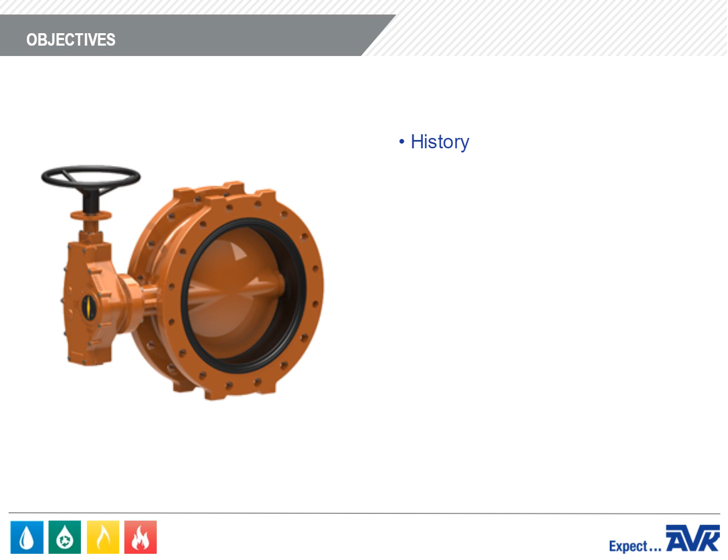Welcome to the American AVK Series 816 Butterfly Valve Overview Module. In this module, you'll learn all about the AVK Series 816 Butterfly Valve, including history, function, standards compliance and testing, butterfly valve construction features, product range, and technical information.

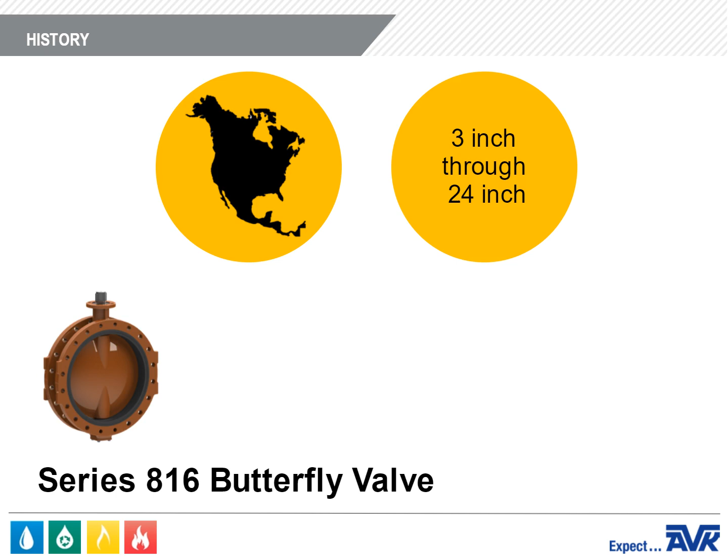The Series 816 Butterfly Valve was developed specifically for the North American market. These are butterfly valves that range from 3-inch through 24-inch, with flanged, MJ, MJ biflange, and wafer end connections. The main function of a butterfly valve is to regulate water flow by turning it on or off.

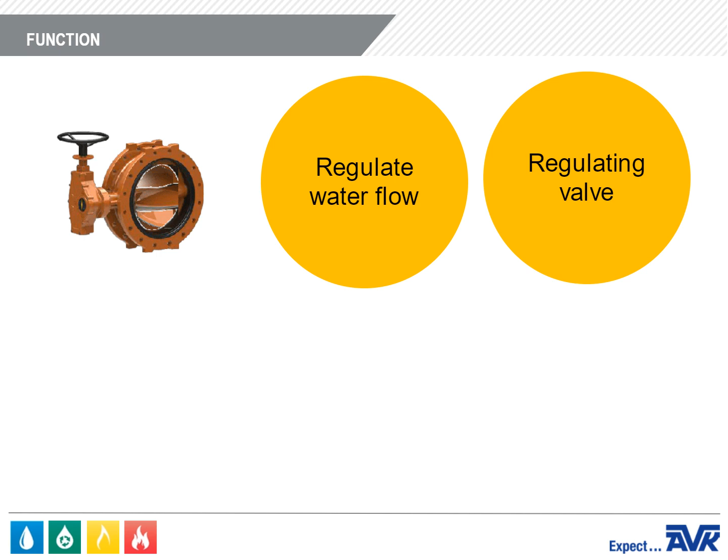It can also be used as a regulating valve, but using this butterfly valve as a regulating valve may create cavitation due to the difference in upstream and downstream pressures, and that can cause damage to the valve, so this should be discussed with AVK before use.

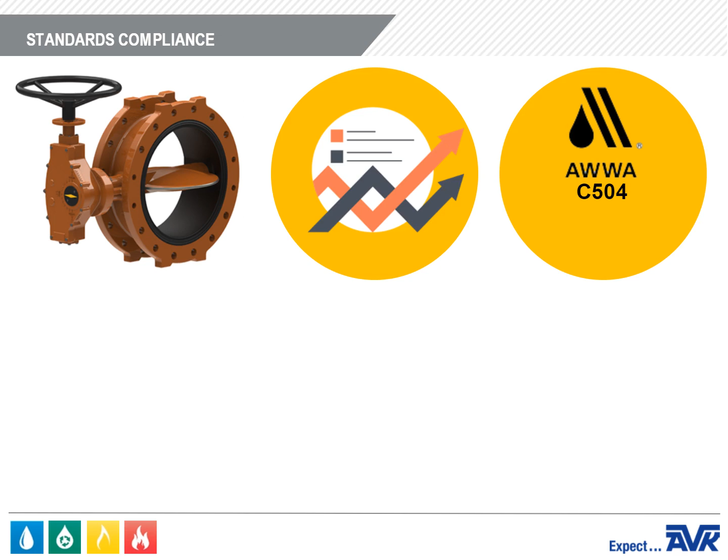The AVK Series 816 meets or exceeds the requirements of AWWA C504, which is the AWWA standard for butterfly valves. The coatings meet or exceed AWWA C550, but keep in mind that the exterior of the above-ground valves can be coated with standard paints.

These butterfly valves are certified to NSF 61 for the health effects of drinking water and NSF 372 for lead. And, as with all AVK products, they are manufactured in an ISO 9001, ISO 14001 certified facility. The AWWA proof testing has been completed as required by C504.

A 12-inch valve was cycled for 10,000 cycles, and a 24-inch valve was cycled for 5,000 cycles, all at 250 psi unbalanced pressure. The nickel-copper welded seat was cycled 100,000 times on a 4-inch valve, and then cycled for an additional 100,000 cycles on a 12-inch valve.

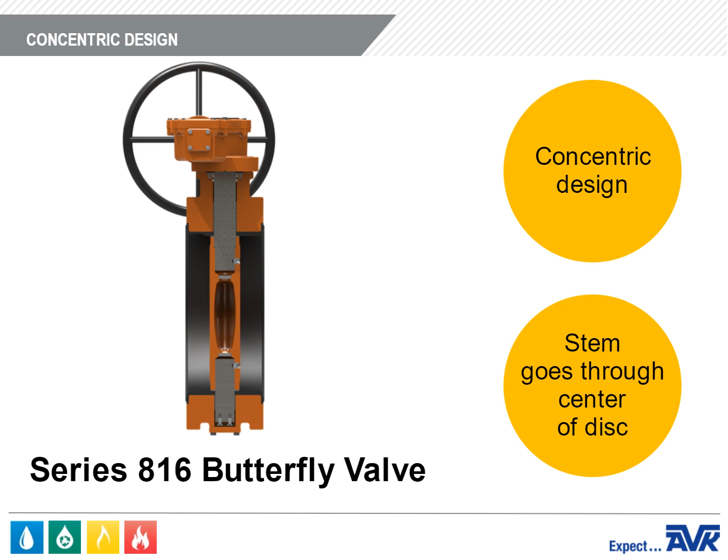Now let's discuss the design and construction of the AVK Series 816 butterfly valve. The Series 816 butterfly valve is a concentric design, which means the stem goes through the center of the disc as opposed to an eccentric design where the valve disc would be to one side of the stem. The advantages to the concentric design are that it is a low head loss design and the valve is bidirectional, which means it seals equally in both directions.

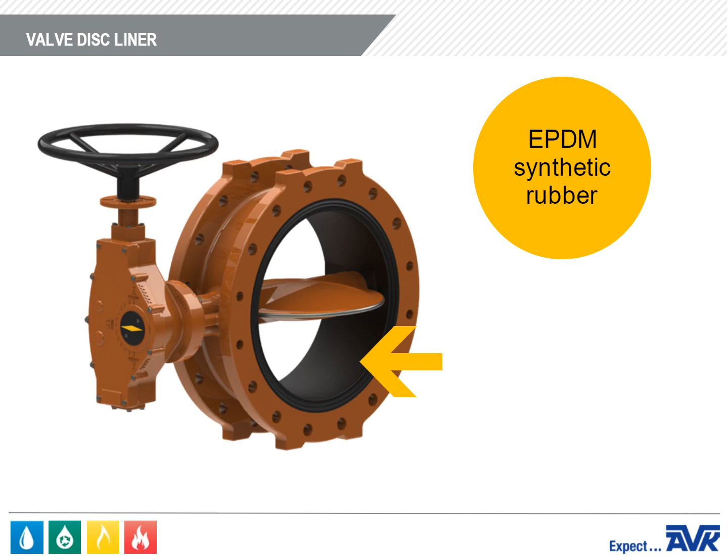The valve liner is EPDM synthetic rubber. The EPDM is a proprietary formulation by AVK Gummi. It's called EDJ70. This formulation is required for Series 816 due to its low swelling and compression set properties. The valve seat does not require seat adjustment.

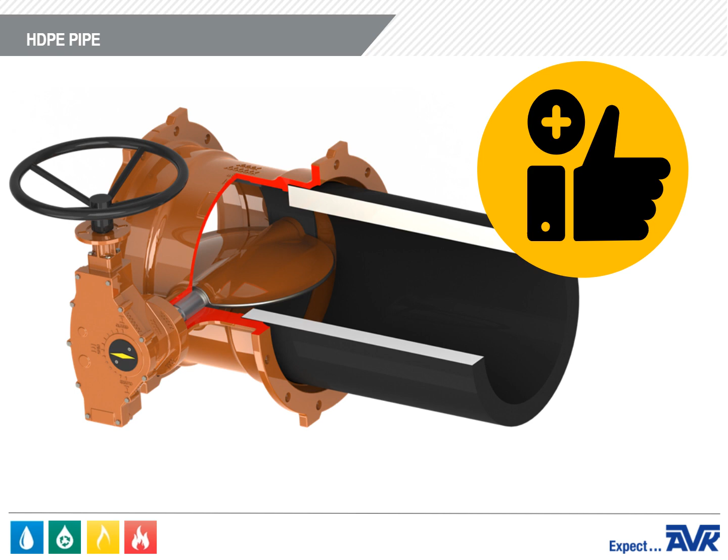The rubber seat also forms a flange gasket on the flange and wafer butterfly valves. With this design, contractors save on gasket expense. Wouter Witzel, an AVK sister company and butterfly valve manufacturer, has used this design for many years and has not experienced any problems.

A big advantage of the Series 816 butterfly valve comes when it's used with HDPE pipe on MJ valves. The MJ and MJ flange versions have been designed to accommodate PE pipe without requiring beveling the pipe for disc clearance. This is up to and including DR9 pipe. No other manufacturer that we know of can do this.

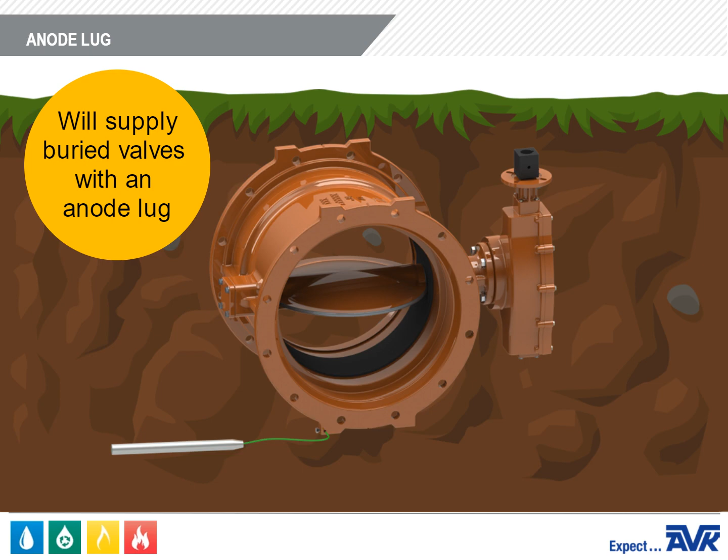AVK will also be able to supply buried valves with an anode lug. As you can see, this valve has feet. The feet on the valve body can be drilled and tapped for anode lugs.

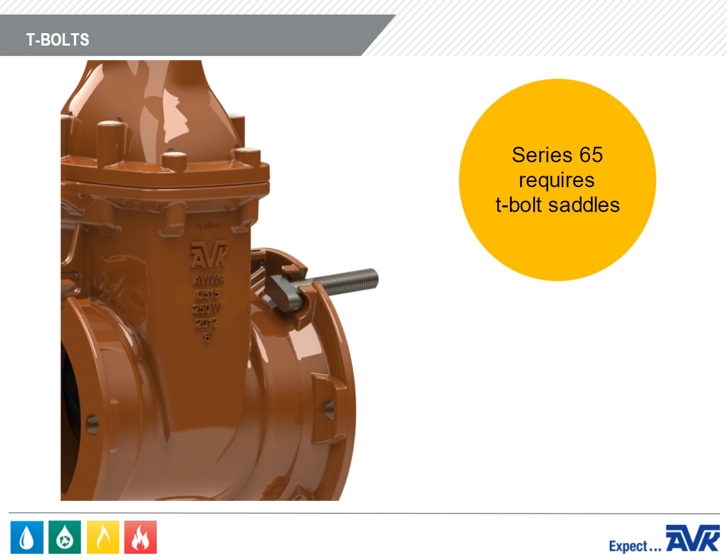The AVK Series 65 has T-bolt saddles to stop the T-bolts from rotating out when the valves are installed. Since this valve is so long to accommodate the HDPE pipe, all of the holes of the MJ bolts are circular, so you don't need the T-bolt saddles and the T-bolts will not rotate out of the U-slots.

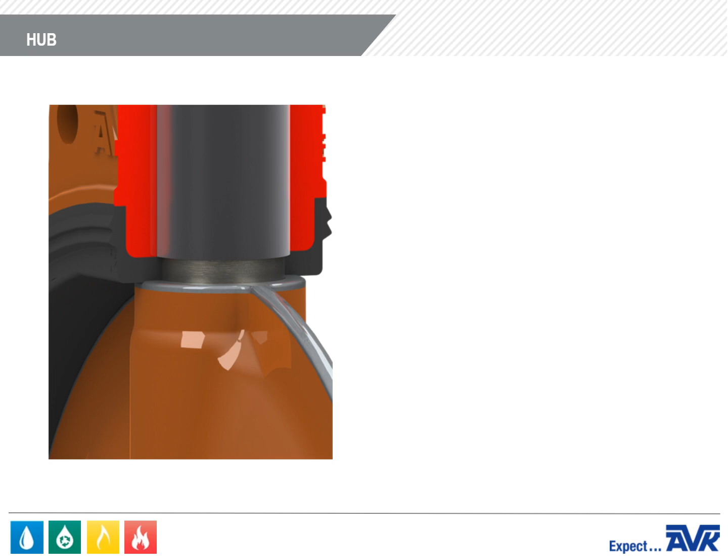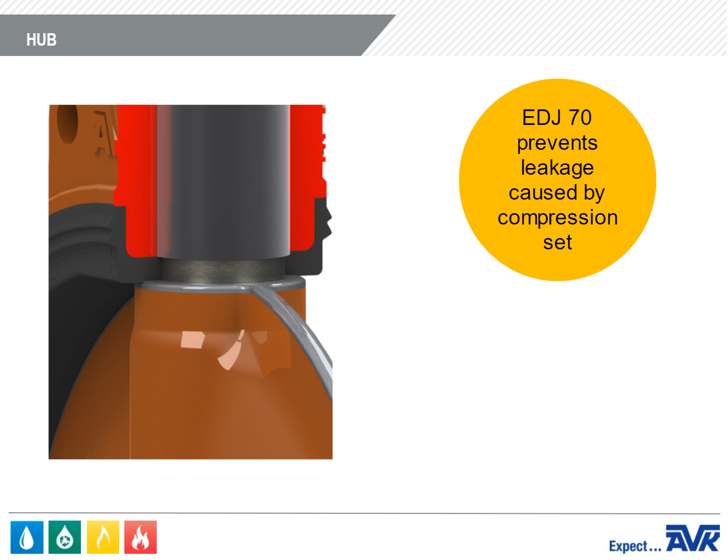At the center of the butterfly disc is the hub. The hub and the rubber that it seats against are both flat. This spreads out the load and prevents compression set. The low compression set rubber, EDJ70, prevents leakage that might be caused by compression set.

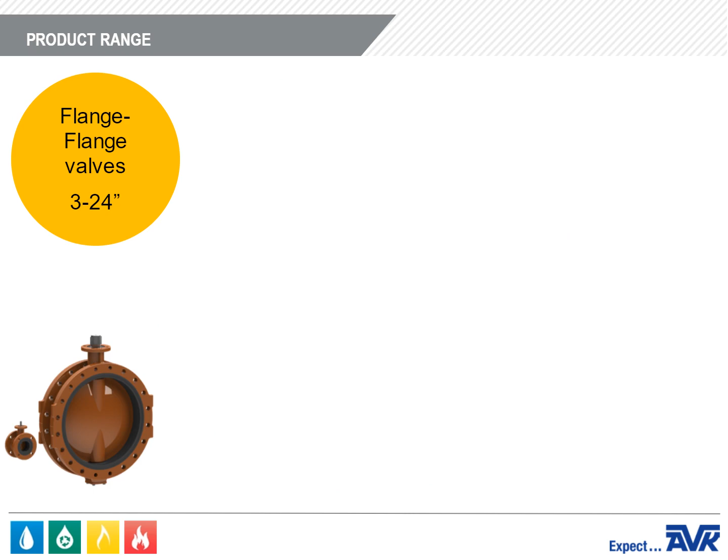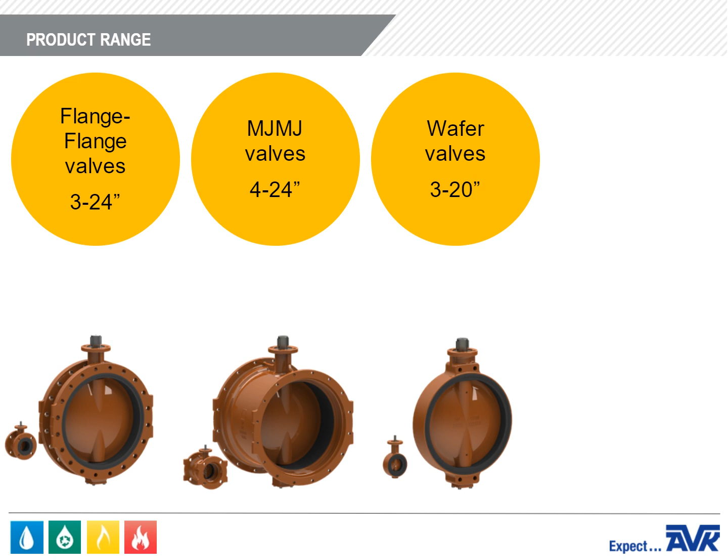The AVK Series 816 has a full product range up through 24 inches. Flange valves are 3 through 24 inch, MJ are 4 through 24 inch, wafer valves are 3 through 20 inch, and the MJ flange valves are from 6 to 24 inches.

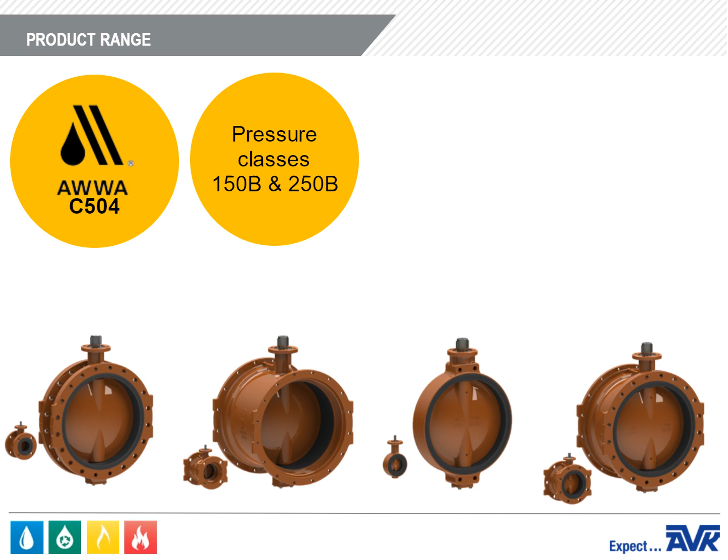AWWA C504 has pressure classes 150B and 250B. AVK supplies them both. The B stands for the flow velocity and means that these valves are rated for up to 16 feet per second. If they were 150A or 250A, it would mean that the valves were only rated for 8 feet per second.

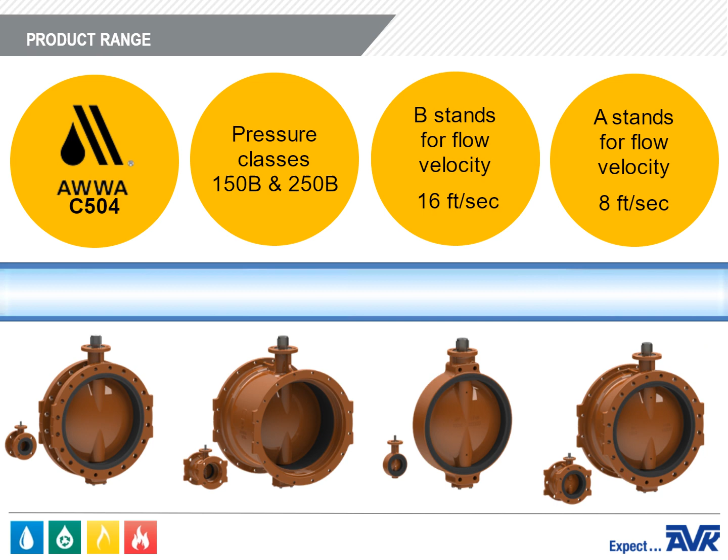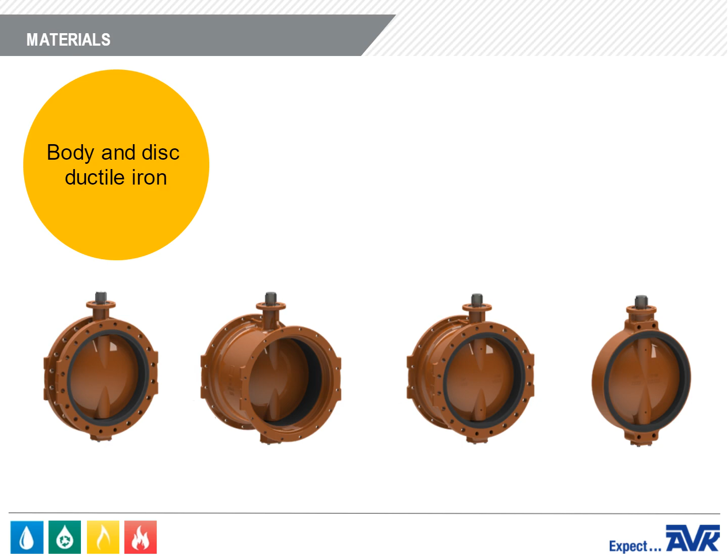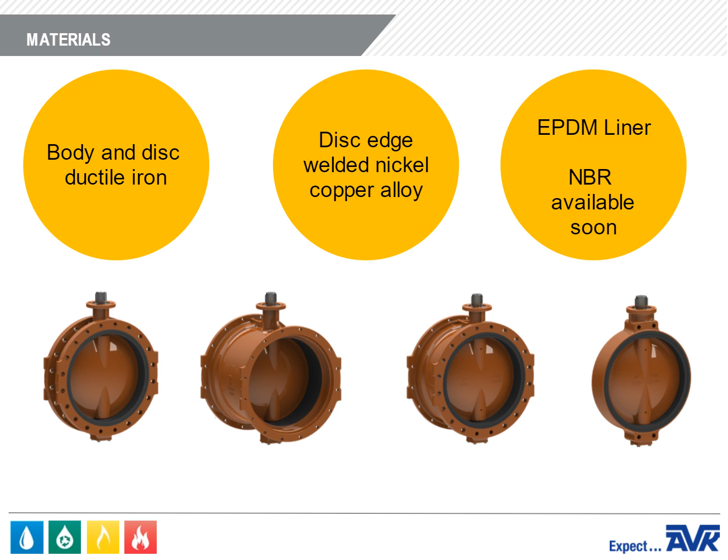Now let's review the technical information of the Series 816 butterfly valve. First, the materials. The body and the disc are both ductile iron, and the disc edge is a welded nickel-copper alloy. The liner is currently EPDM, but NBR will eventually be an option. The stems for both the Class 150 and Class 250 are 17-4 PH stainless steel.

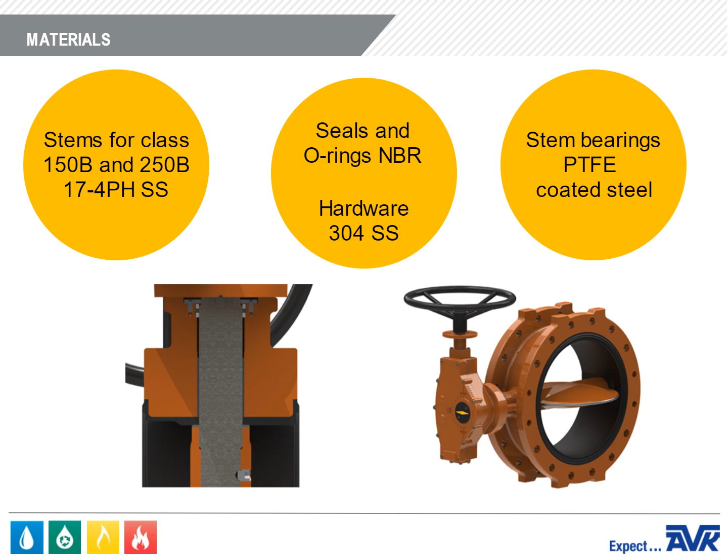All of the seals and O-rings are NBR, and all of the hardware to bolt it together is 304 stainless steel. The stem bearings are PTFE coated steel with copper tin plating for corrosion protection. One of the key features are the stem seals. AVK stems are triple sealed.

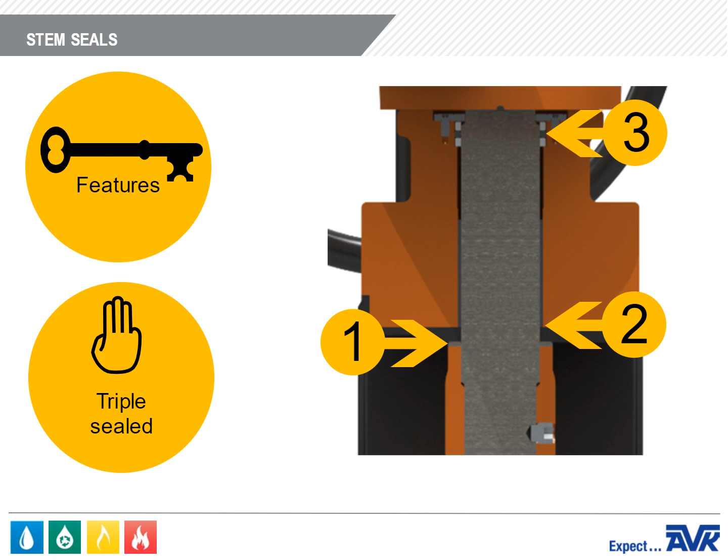The first seal is the flat area where the disc intersects the liner. That flat area prevents water from getting into the stem. The second is where the stem goes through the liner. The liner is a slightly smaller diameter than the stem, so it acts like an O-ring, which also prevents leakage. And finally, there's an O-ring between the two Delrin rings at the top of the hub of the valve.

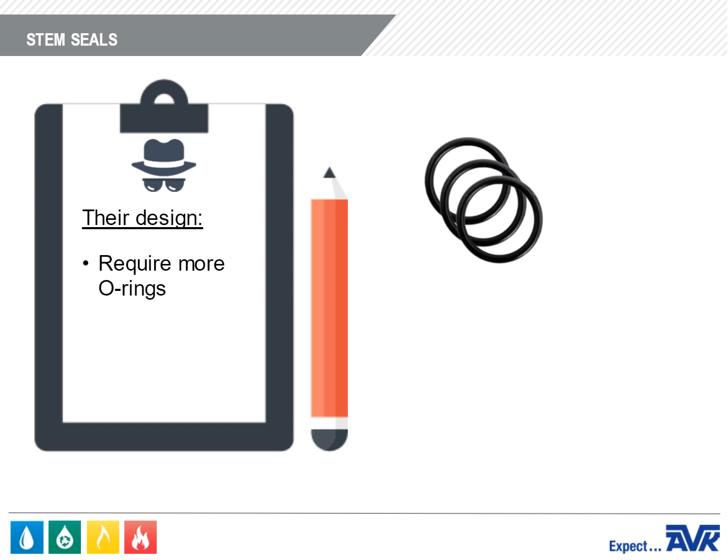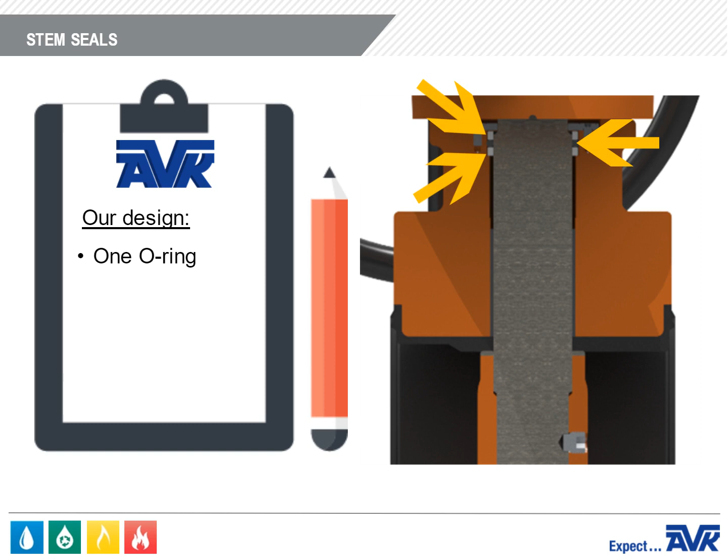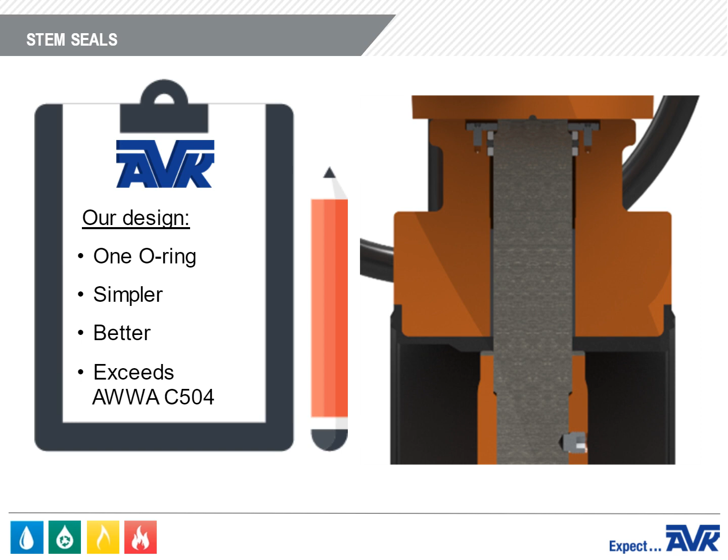Note that some designs using different types of O-ring cartridges require more O-rings and increase the number of possible leakage paths. AVK elected to use one O-ring held between two Delrin bushings. The two Delrin bushings act as an O-ring cartridge to keep the O-ring in place. The AVK design is simpler, better, and exceeds the requirements for AWWA C504. The AVK O-ring is replaceable without removing the stem, as required by AWWA.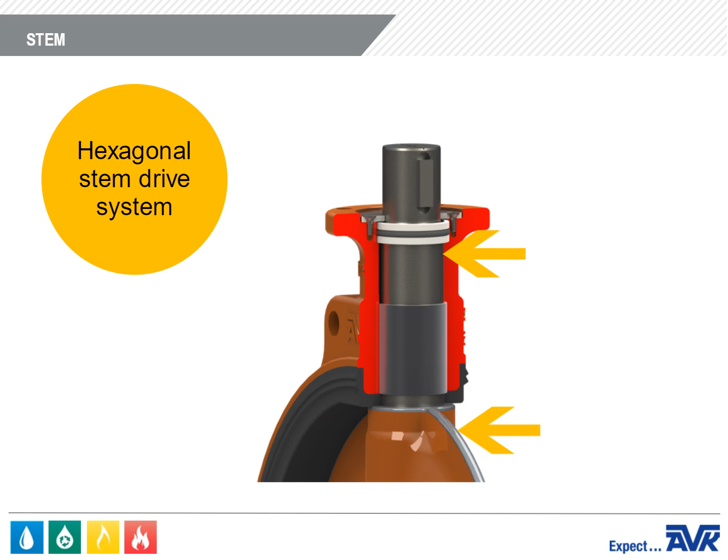Our stems connect to our discs with a hexagonal stem drive system. The driving stem is shaped as a hexagon, which then transmits the torque loads to open and close the butterfly valve to the disc. AVK is the only company that we know of that does this. All of our stems are high-strength 17-4 PH stainless steel.

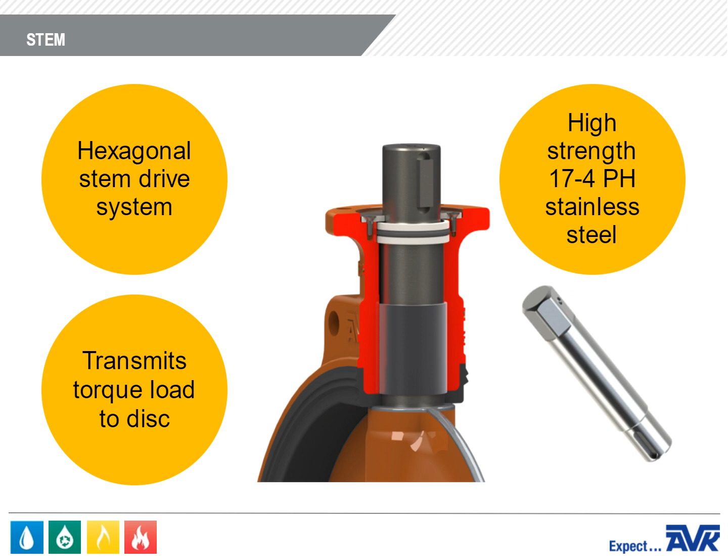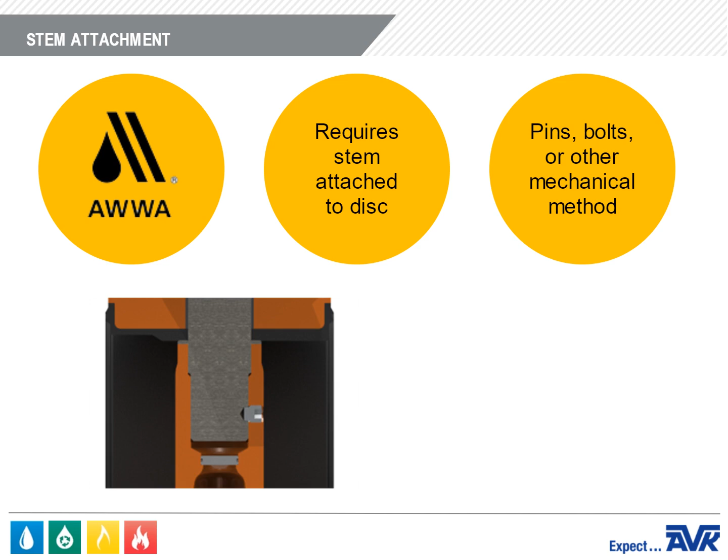The AWWA standard for butterfly valves requires that the stem be attached to the disc with pins or bolts or some other mechanical method. We don't need that because we have the hexagon drive, and we have a blowout preventer which holds the stem in place. AVK has added a set screw to mechanically attach the stem to the disc.

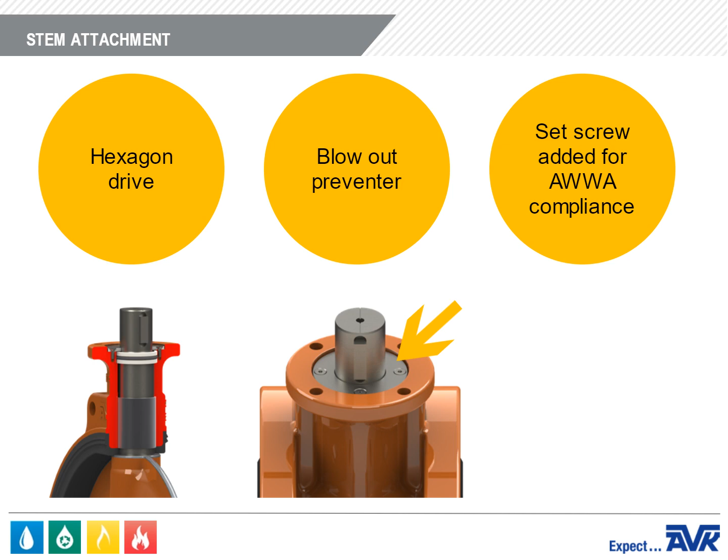The Series 816 butterfly valve is modeled on the AVK Series 75 butterfly valve, which was developed by Wouter Witzel. AVK and Wouter Witzel have a large amount of experience with the Series 75, and the head loss of the Series 75 and the Series 816 will be close to identical. The Series 75 and Series 816 head loss data is shown here.

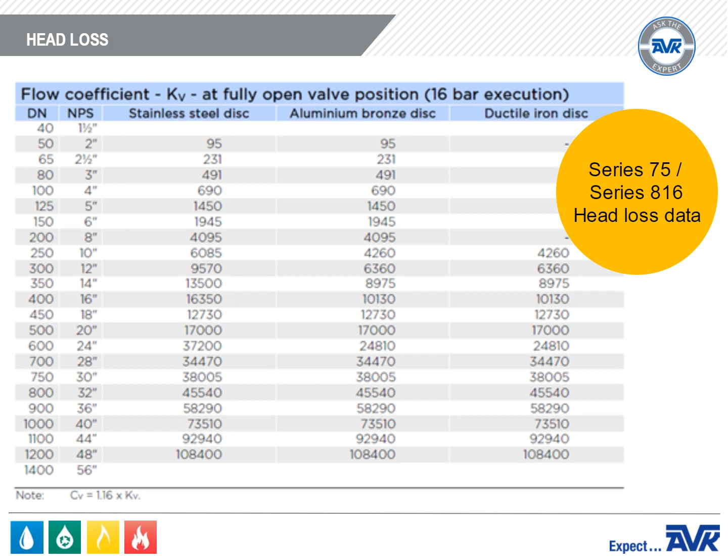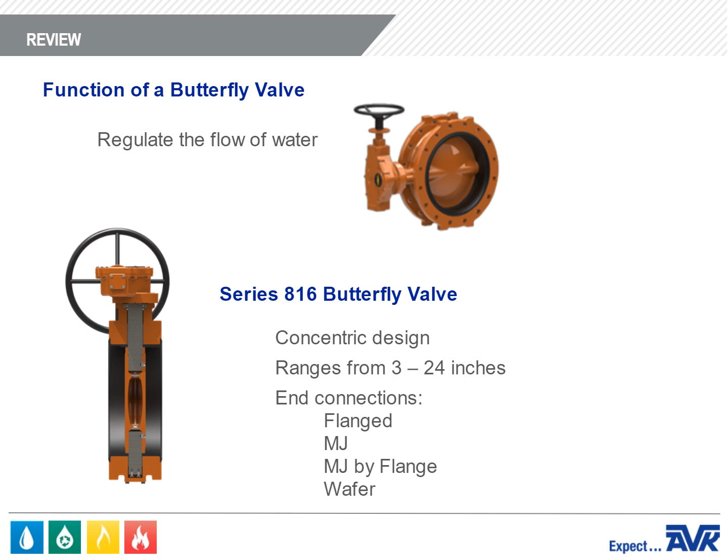Congratulations! You've completed the American AVK Series 816 butterfly valve overview module. Now that you've completed this training, let's review the highlights of the module. In this module, you learned that the main function of a butterfly valve is to regulate the flow of water by turning it on or off. The Series 816 butterfly valve is a concentric design valve and ranges from 3 to 24 inches. It's available with flanged, MJ, MJ by flange, and wafer end connections. The advantages of the concentric design are that it is a low head loss design and the valve is bidirectional.

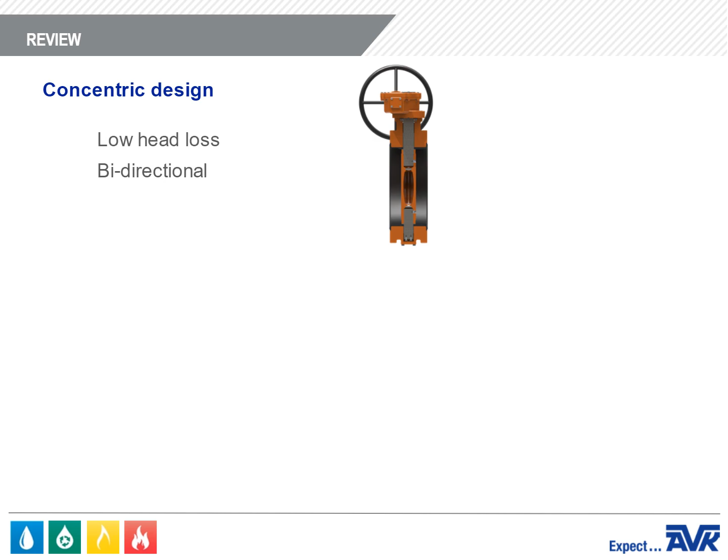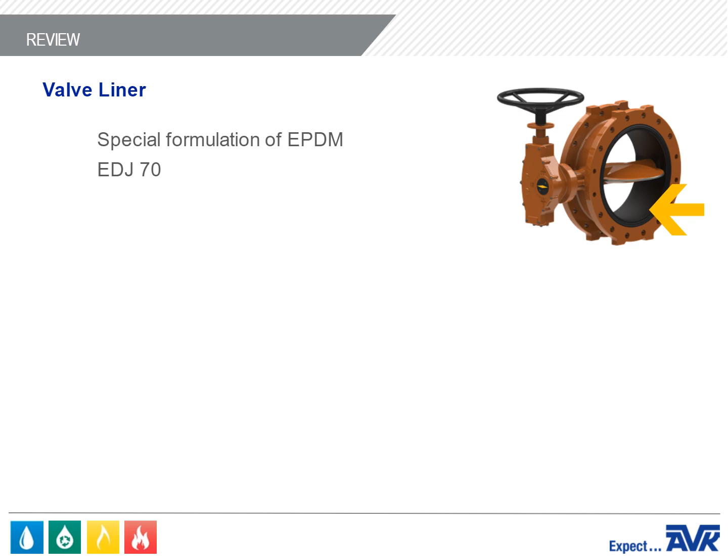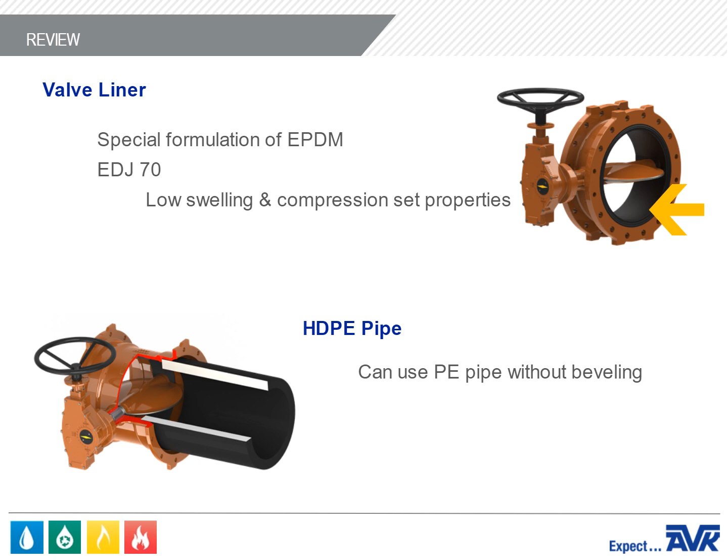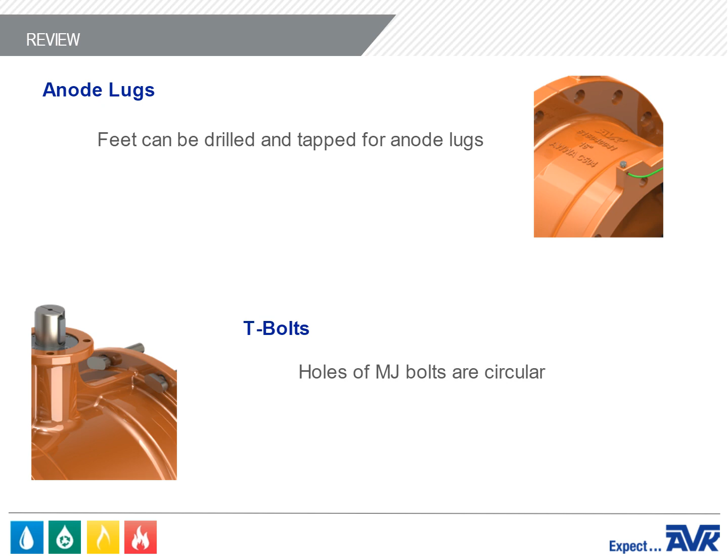The valve liner is a special formulation of EPDM rubber called EDJ70. EDJ70 is used due to its low swelling and compression set properties. The Series 816 butterfly valve can be used with HDPE pipe on MJ valves without beveling the pipe for disc clearance. The feet on the valve body can be drilled and tapped for anode lugs. Because all of the holes of the MJ bolts are circular, you don't need to use T-bolt saddles to keep the T-bolts from rotating out.

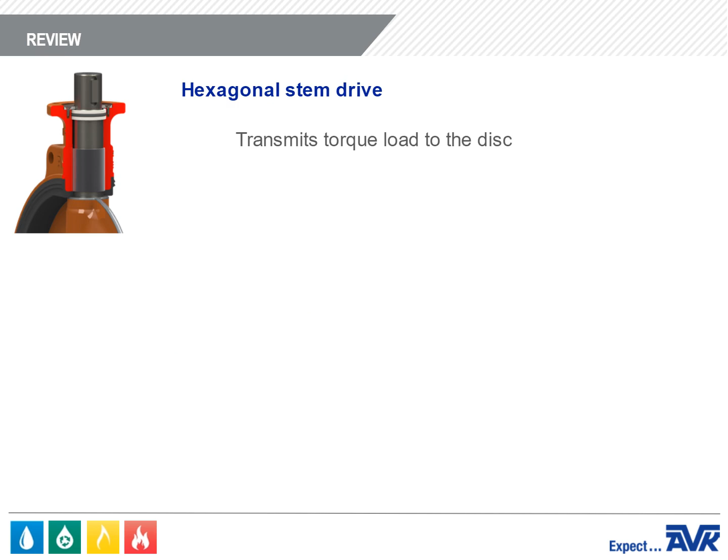The hexagonal stem drive system transmits the torque loads to open and close the butterfly valve to the disc. AVK supplies pressure classes 150B and 250B. One of the key features are the stem seals. AVK stems are triple sealed. AVK elected to use one O-ring held between two Delrin bushings. The two Delrin bushings act as an O-ring cartridge to keep the O-ring in place. The AVK design is simpler, better, and exceeds the requirements for AWWA C504.